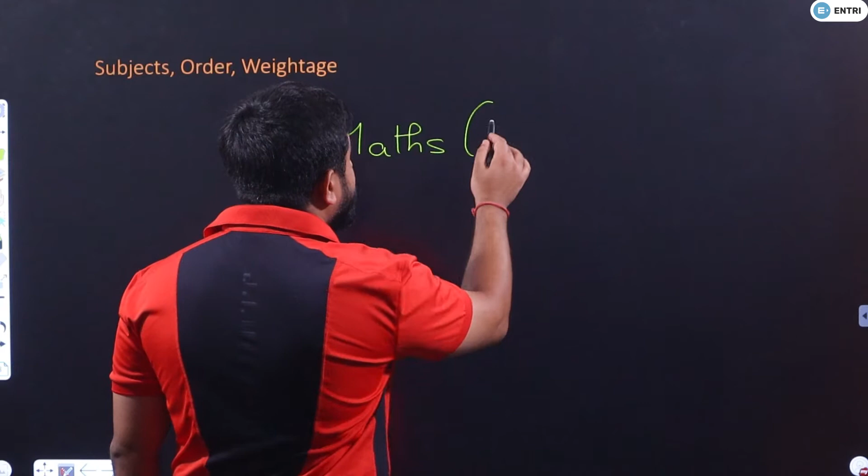Moreover, out of 100 marks of GATE exam, maths is going to give you around 15 marks, 13 to 15 marks.

If you know maths, the basics are going to be helpful to you in the derivations of strength of materials, theory of machines especially the vibration chapter, and fluid mechanics, because fluid mechanics is maths only.

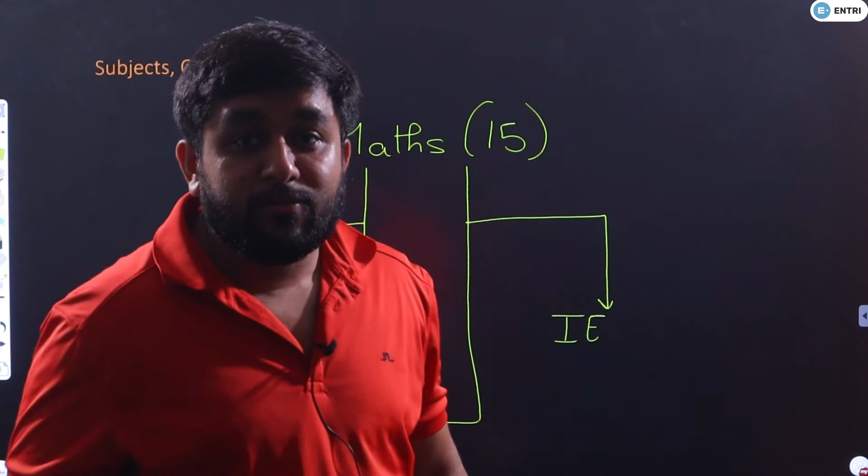It is like maths only, and the same maths will help you in derivation of heat transfer also. Moreover, maths helps you a lot in industrial engineering. For all these subjects, if you are good in maths, especially differential equations, calculus, maxima, minima, graphs, and solving differential equations, those two chapters are required.

But for industrial engineering, you need probability and statistics also. So if you know maths now, not only will you get these 15 marks, but you will get these remaining marks also. That is why maths is very important.

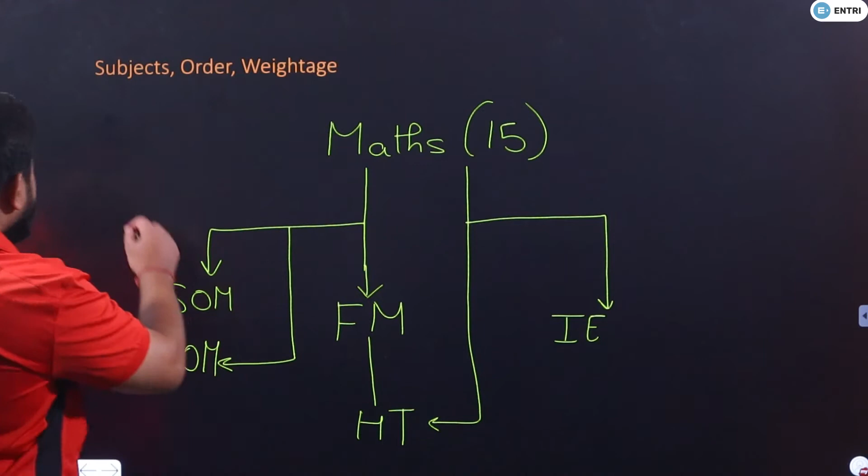Now there is the subject of engineering mechanics also. Engineering mechanics simply means how things move, when you apply force, how things move. So concepts of engineering mechanics are important for strength of material, theory of machines, and fluid mechanics also. Engineering mechanics is the prerequisite for these three subjects.

However, the weightage of engineering mechanics is less. On an average, if you take the last 20-25 years, it is only 4 marks. But it is a very important prerequisite because it will make your life easy in these three subjects, that is why it's important. Even though its weightage is less, I would always suggest before doing these subjects you must go for engineering mechanics.

Now there is one particular subject, manufacturing, and for the GATE exam, manufacturing does not have too much maths or too much concept of mechanics. In actual, manufacturing does require maths, thermodynamics, a little bit of fluid mechanics and heat transfer, a little bit of engineering mechanics, in fact a lot of engineering mechanics and SOM also. But our syllabus of manufacturing now is not much based on these subjects.

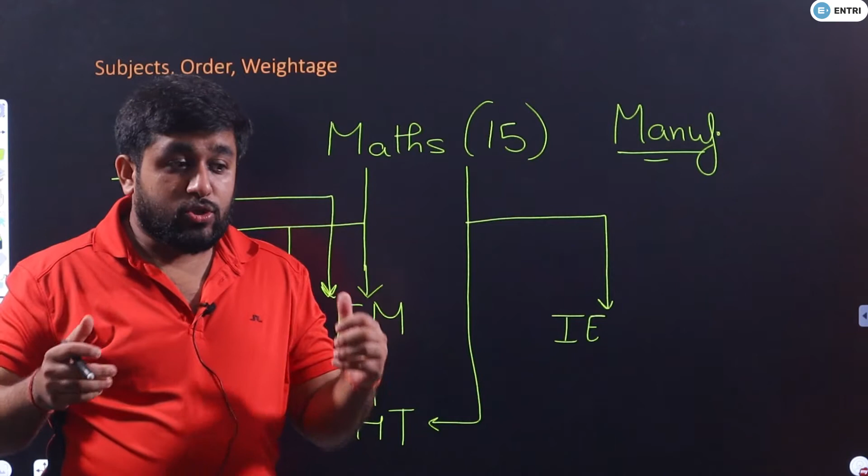So you can study it just after maths also. And why can you do that? Because manufacturing is a big subject with a lot of knowledge-based points in it, not concepts, knowledge-based points - what is the temperature of this, what is this material, like this. So such kind of subjects you have to revise again and again, then only your memory of this subject will be sharp.

If you do the subject before the other subjects, you will have a lot of time to revise it. You can revise it again and again, and you will definitely become very strong in the subject. And why is it important to be very strong in this subject? Because it holds a weightage of 17 marks, that is why it is very important.

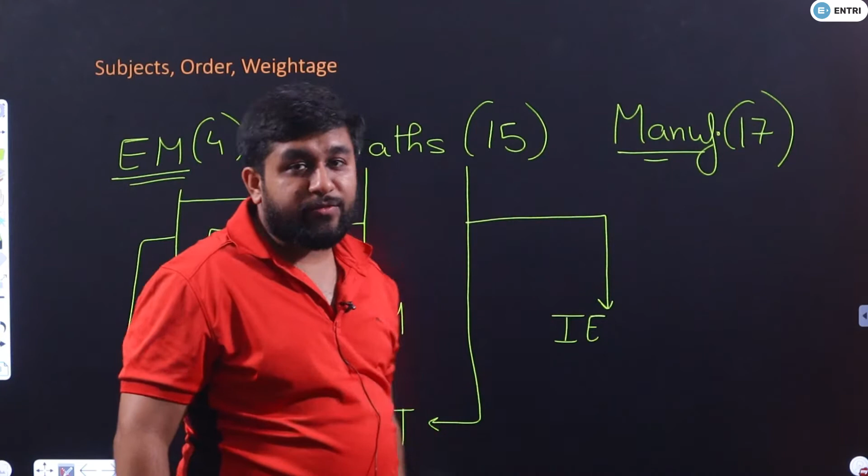So you can do one thing: prepare maths first, then start preparing manufacturing. After your maths and manufacturing are over, then you can look for the remaining subjects. Sir, is there any subject pending? Yes, a very big subject is pending, thermodynamics, and thermodynamics will hold a weightage of 9 to 11 marks, most probably 10 marks.

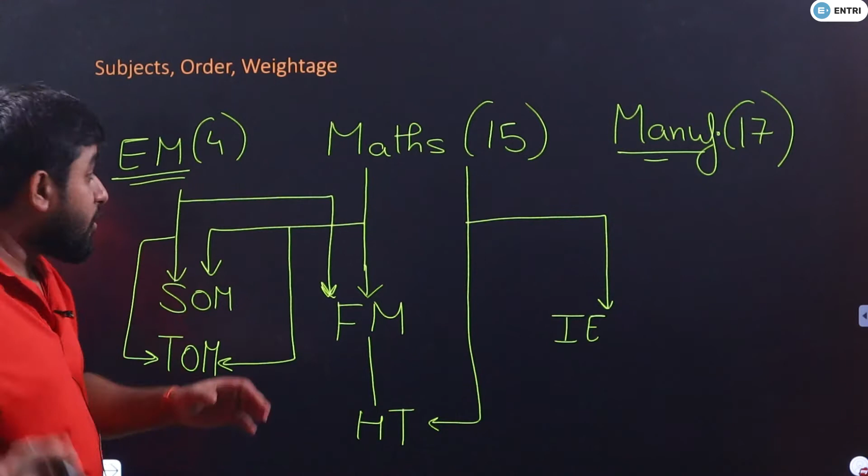So it is a big subject without any prerequisites. Whenever you are starting preparation for the GATE exam, it is always important to cover these subjects first, because these three subjects do not have prerequisites. In fact, they are the prerequisites of other subjects, and manufacturing has a lot of weightage. So it is always suggested to go for these subjects first.

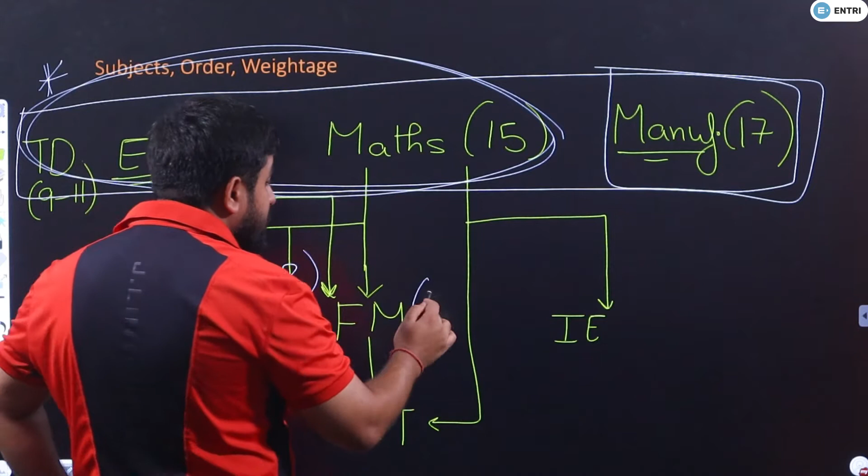Then what about SOM, sir? How much weightage? 6 to 8 marks. Sir, how much weightage ToM? 7 to 9 marks. Sir, how much weightage FM? 7 to 9 marks. How much weightage heat transfer? 4 to 5 marks. And how much weightage industrial engineering? 4 to 5 marks. And yes, there is general aptitude also, right?

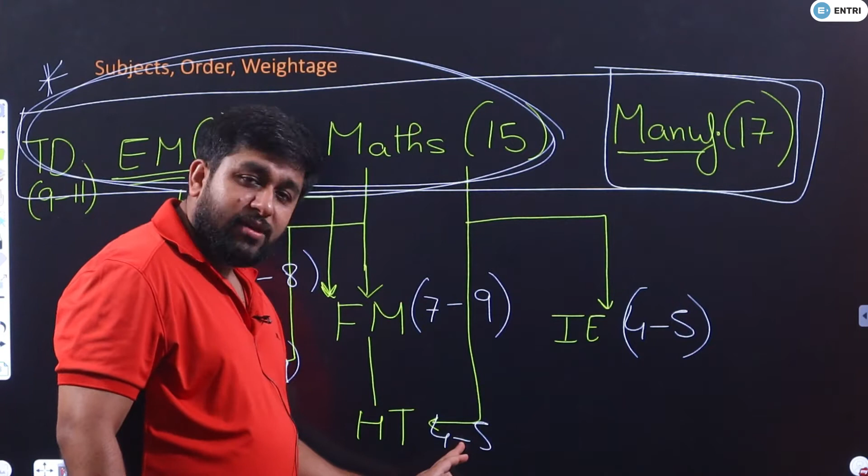General aptitude itself is 15 marks. I think if you take the sum, it will be somewhere around 85 now. So 10 plus 4 is 14, 14 plus 15 is 29, 29 plus 17 is 46, 46 plus 7 is 53, 53 plus 8 is 61, 61 plus 8 is 69, 69 plus 4 is 73, and this contributes to 80. So basically 1 mark here and there - actually the weightage of a subject is not fixed, it can go up and down. So near about they are going to give you 85 marks, with 15 marks for aptitude.

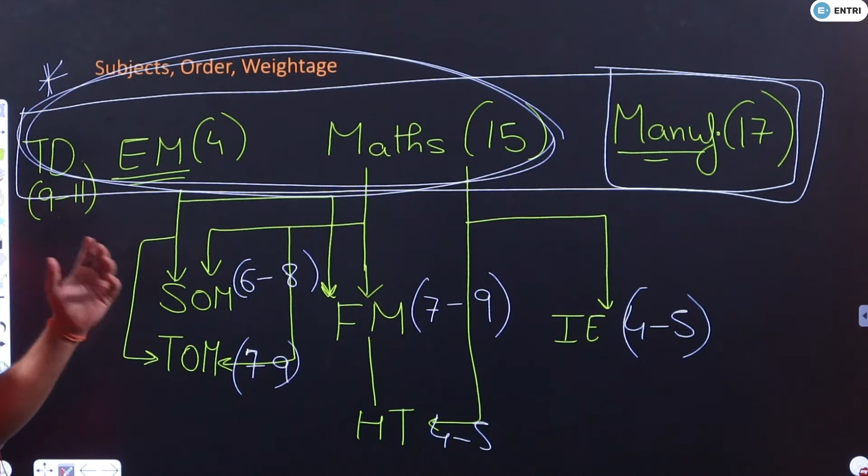Now let us discuss the syllabus one by one. What is the syllabus of thermodynamics, fluid mechanics, heat transfer, maths, and then engineering mechanics, strength of materials, theory of machines, machine design, etc.

You might say, sir, why have you not written the topics of the first 4 subjects? Bhaiya, I am the best expert of these subjects, so I don't need to write the topics of these subjects. I can tell you directly, that's why.

So guys, thermodynamics - this subject is thermo plus dynamics. Thermo means heat and dynamics means the effect of heat. Dynamics means effect, change, variation. So variation due to heat.

Actually, a little bit of talking about thermodynamics was going on from 2000 years ago, but the subject came into picture when the steam engine came into picture, when we realized that yes, heat can be converted into work. That is when the subject started.

Initially the aim was to understand how we can convert heat into work and what are the effects of that work. But later, when we started designing the steam engine, we started developing the concepts of thermodynamics. That is when we realized the concepts applicable over here are actually applicable throughout the universe for any kind of phenomena.

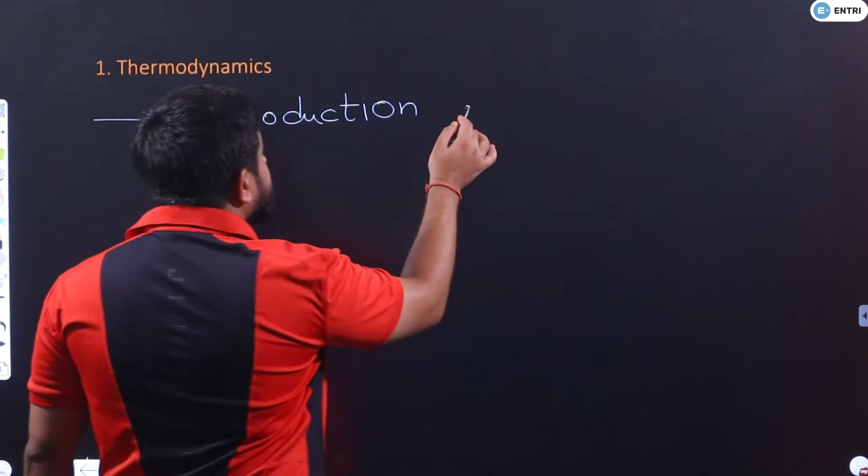So these things you will talk about. And in the introduction and temperature chapter, you will also write down the zeroth law. Now some teachers teach introduction and temperature separately - I generally teach it in a combined way, but it depends from whom you are learning the subject.

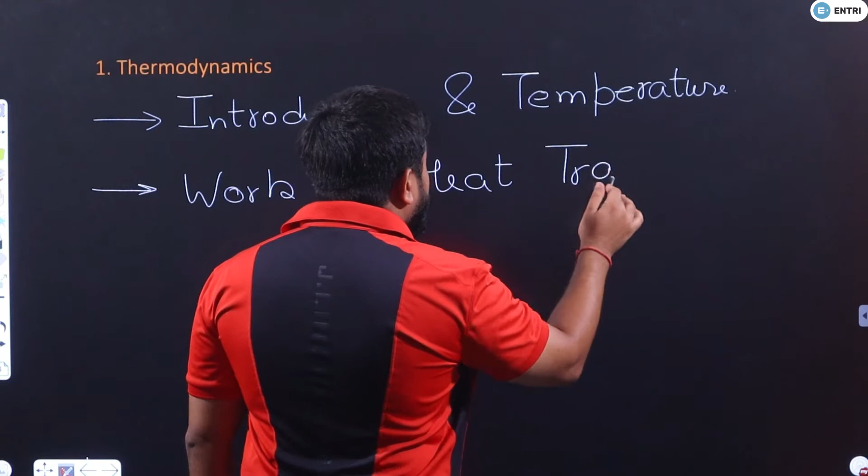Then after learning the basic terms, what will you do? You will talk about work and heat transfer. You will try to analyze if a system is losing or gaining energy in form of heat and work, then how the properties of the system - pressure, temperature and volume - are going to change. So we will learn different heat and work transfer processes.

Some processes you will call isobaric, some you will call isothermal, some you will call adiabatic. So let us suppose we are heating a gas but maintaining the pressure as constant - this will become an isobaric process. Iso means constant, bar means pressure, so constant pressure process.

So you will learn that when we are heating the gas, how the graph will look like - something like this you will try to learn over here. And once you are aware of this work transfer and heat transfer, then you will learn the first law of thermodynamics.

First law of thermodynamics simply says energy can neither be created nor destroyed, it can only be converted from kinetic energy to potential energy, or it can be given from one body to another, like sun to earth. However, it can neither be created nor destroyed.

So you will learn how to apply thermodynamics to various phenomena going on around us. Maybe combustion is going on in the engine - so how to apply this law over there?

So the first law of thermodynamics will be applied for two types of systems - one is closed system and the other is open system. So don't worry, you will learn what is a closed system and what is an open system over there. So don't worry at all.

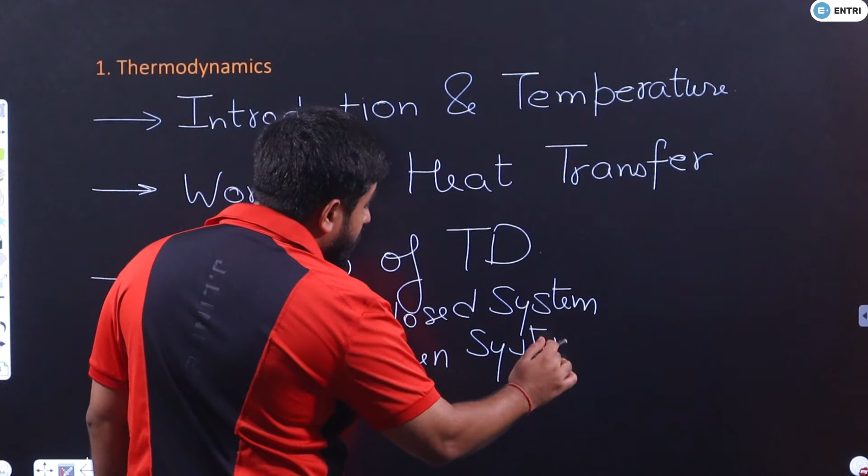Now, the first law of thermodynamics says that when a process happens, the energy is conserved. Someone may lose energy, but someone else will gain that energy.

So thermodynamics tells you energy conservation. Now suppose there is a rod, one side hot, other side cold. The hotter side will lose energy and the cold side will gain that energy, and ultimately the temperature of the rod will become uniform. Energy conservation only says one side is losing heat and the other is gaining heat, but no energy is destroyed or created.

Now suppose there is a rod, initially at uniform temperature. What if one part starts rising in temperature and the other part starts going down by itself? Can it happen by itself? No. If one side is hot and other side is cold, they will exchange heat and the temperature will become the same. But is it possible that initially the temperature is the same, and by itself one side starts going down and the other side goes up?

The first law of thermodynamics says if one side is losing heat, temperature going down, the other side will gain that heat and temperature will go up. First law only says this, but it does not say that the reverse is not possible. It cannot happen that the temperature of this rod, initially same everywhere, starts rising on one side by itself and falling on the other by itself.

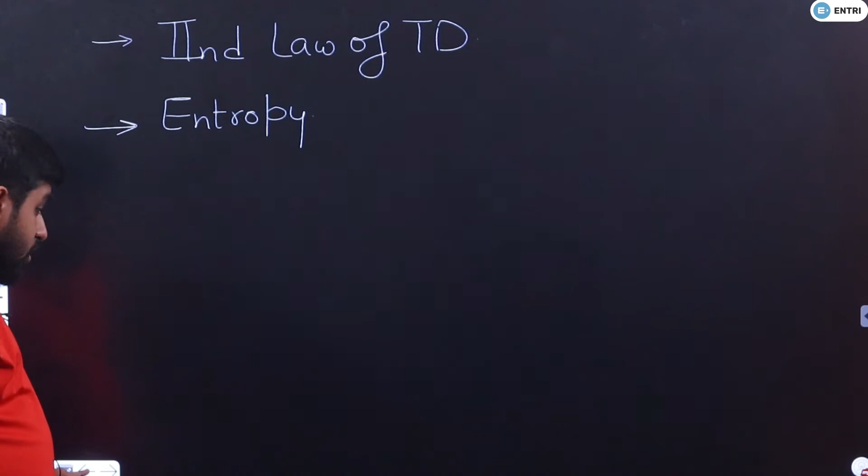Actually, when you apply the first law for a closed system, and then apply the first law for an open system, similarly you will apply the first law for a process and for a cycle also. Similarly, the second law applied for a process and the second law applied for a cycle. So when the second law is applied for a process, this property comes into picture, that the substance has an additional property called entropy.

Every substance has a property called entropy, and during any process, when the bulb is giving me light, when I am speaking to you, when you are watching the lecture, the entropy of the universe is increasing. So we will talk about the entropy principle and see how it is applicable to devices like power plants, IC engines, refrigerators, etc.

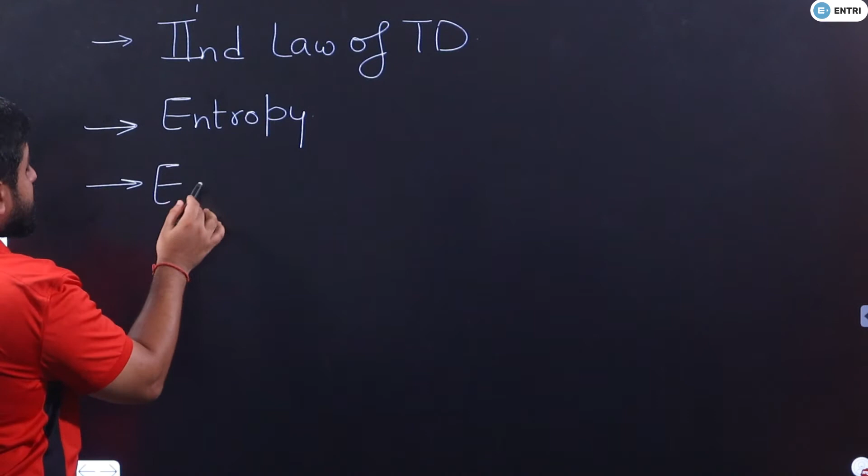After this we will also talk about the concept of exergy, that is, how much out of the available energy can be converted into useful form. Then the topic of some thermodynamic relations will come into picture, like Maxwell's equations, Joule-Thomson effect, thermodynamic relations.

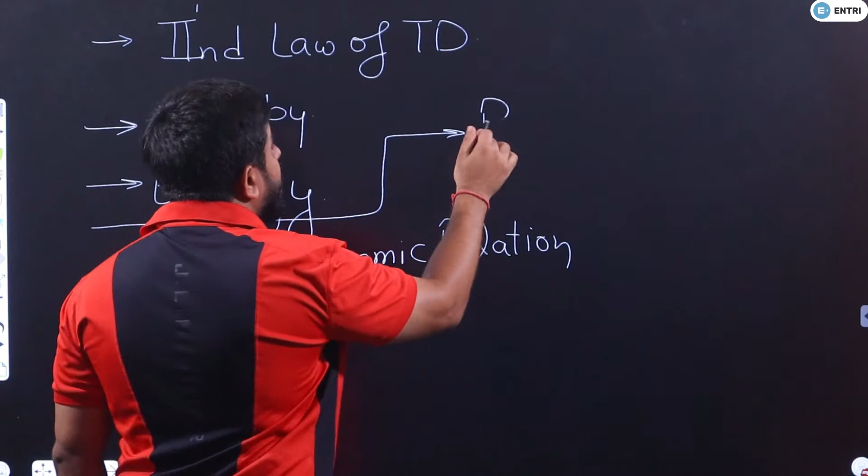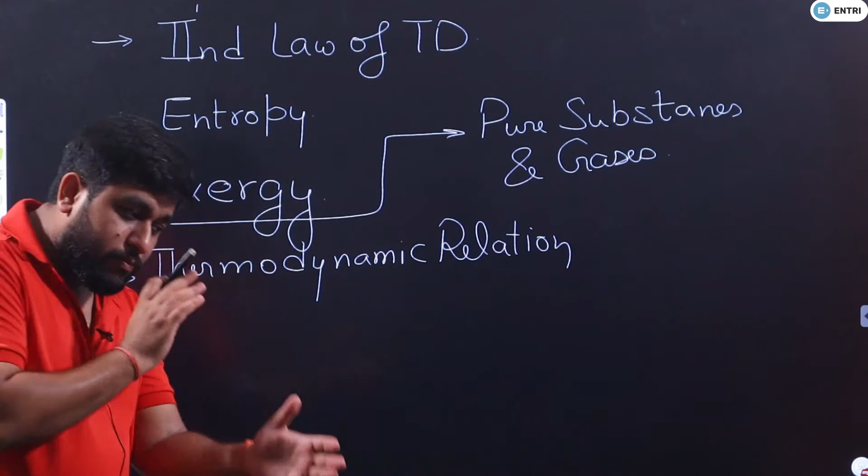We will also talk about pure substances, and draw different charts for pure substances and gases. If you are heating them, what will be the pressure-temperature chart, the pressure-volume chart, enthalpy-entropy chart, enthalpy-temperature chart, pressure-enthalpy chart. So such kinds of graphs we are going to discuss.

Now, once this is over, in thermodynamics you have to do some additional chapters. This is actually called basic thermodynamics. So what you have to do is apply these concepts to power plants. That chapter will become the Rankine cycle, which is the thermodynamic cycle on which a steam power plant is based.

In the Rankine cycle, you will have some modifications also, like regeneration and intercooling. So we are going to see the thermodynamic cycle of a power plant, like what must be the boiling temperature in a boiler, what must be the condensation temperature in a condenser, how much power the turbine will produce, and how much power will be required by the pump.

So, what is the efficiency of a steam power plant, what will happen if we do regeneration in the cycle, what will happen if we do intercooling in the cycle. So, that you are going to talk about.

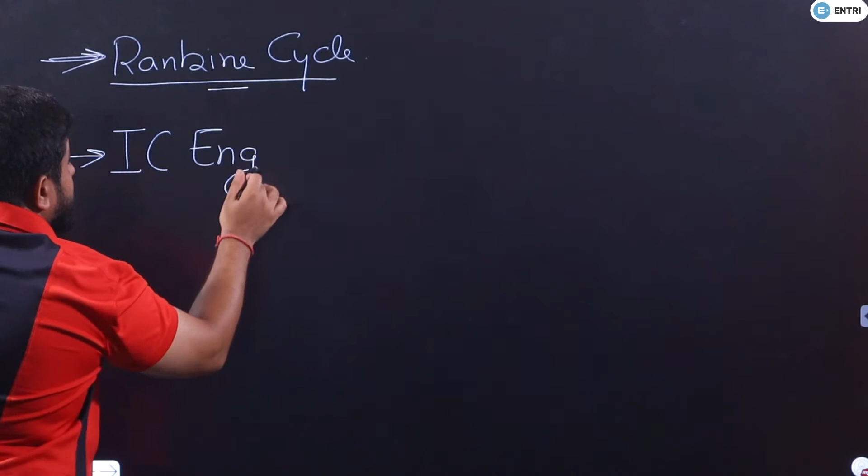Now, similarly, like you have talked about steam power plant, we will also talk about IC engine cycles. Basically, during the combustion process, how the pressure and temperature varies in the combustion chamber. So, IC engine cycles - there will be an Otto cycle related to petrol engines, diesel cycle related to diesel engines, similarly Brayton cycle related to gas turbines. A lot of cycles will be there. Actually, instead of writing here IC engine cycles, better we write down air standard cycles.

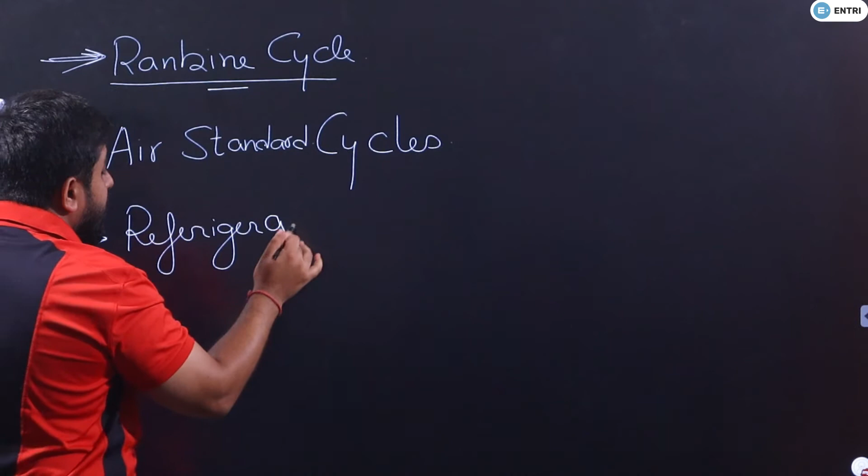Air standard cycles. And the last chapter will be related to refrigeration and air conditioning. So, this is your subject of thermodynamics, and these are the important chapters that you have to do.

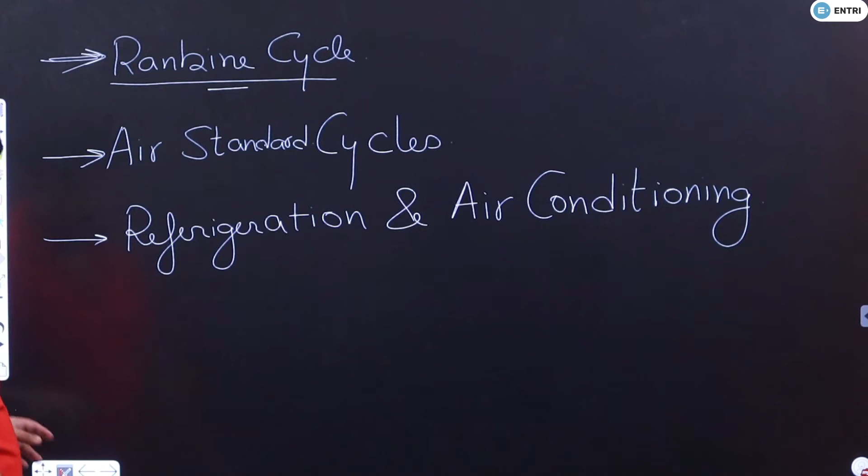Now, you will ask me, sir, what are the important chapters? Frankly speaking, every chapter is important. If you really want to become an engineer, then all these chapters are important. But still, from exam point of view, if you are asking, then definitely air standard cycles, Rankine cycles, refrigeration, air conditioning, then you have entropy, properties of pure substances - these are the most important chapters.

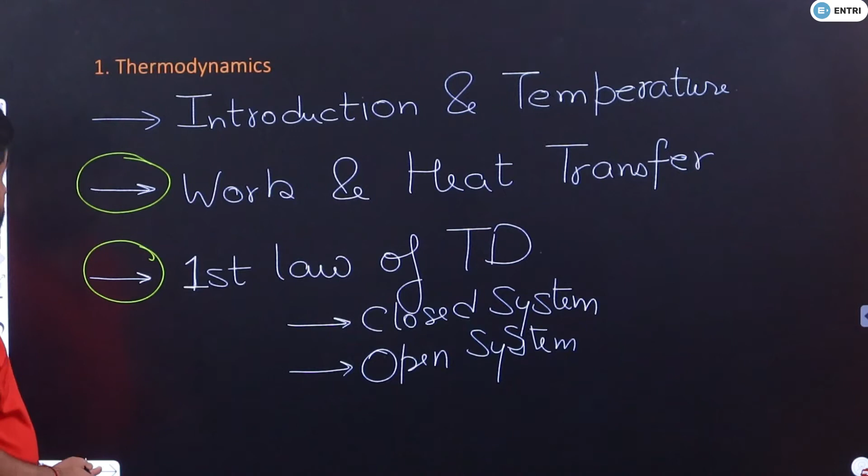Then sometimes from second law of thermodynamics, first law of thermodynamics, work and heat transfer also questions come. But yes, these star mark chapters are the most commonly asked questions in the exam. In fact, from refrigeration and air conditioning, every time 2 to 3 marks question might be there. Every time a 2 marks question from air standard cycle, and almost every time 2 or 3 marks from pure substances. So, these chapters are the most important.

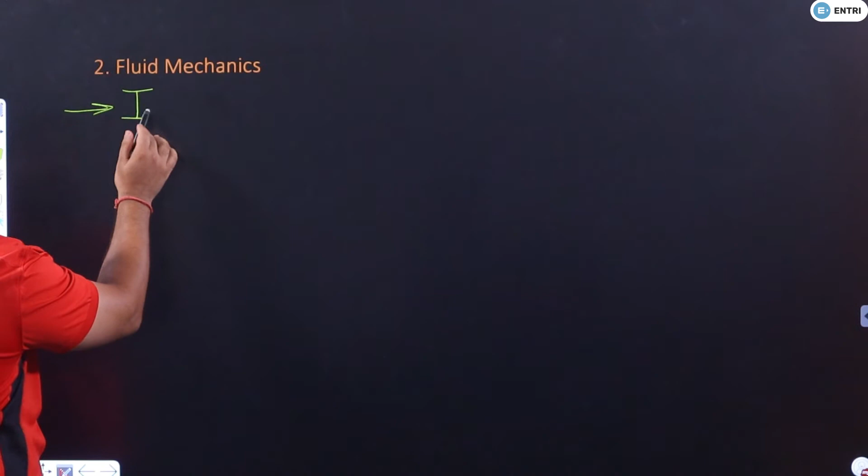Now, let us move ahead. I am not going very deep, I am just giving you a hint of the chapters. Now, when we are talking of fluid mechanics, first of all, definitely there will be the introduction of the subject - what the subject is all about.

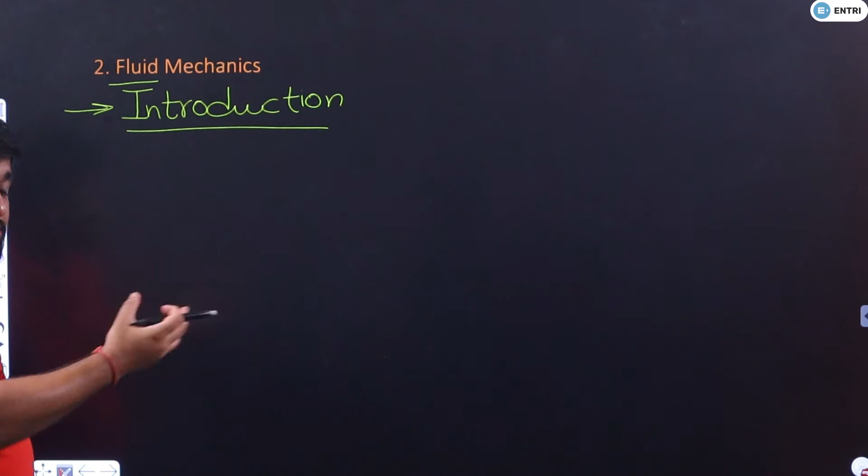Fluid mechanics - mechanics means understanding the motion and deformation of a substance. When you apply force, how the substance is going to move, how the substance is going to deform. So, if the substance is fluid, then fluid mechanics. So, first of all, you introduce yourselves: what is the objective of the subject, what are the applications of the subject.

And you talk about properties, some important properties which will be helpful in understanding the motion and deformation of the fluid. What are those properties? Density, bulk modulus, then viscosity, a very important property. When you are learning viscosity, there is an effect of viscosity called boundary layer.

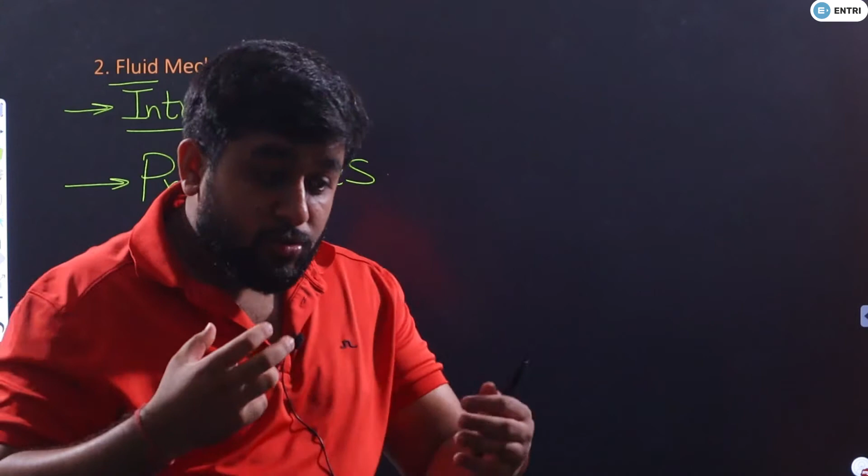Other important property from exam point of view, that is surface tension and vapor pressure, saturation pressure. Then after properties, you will move on to the first set of problems, that is fluids at rest. So, chapter name will be called fluid statics.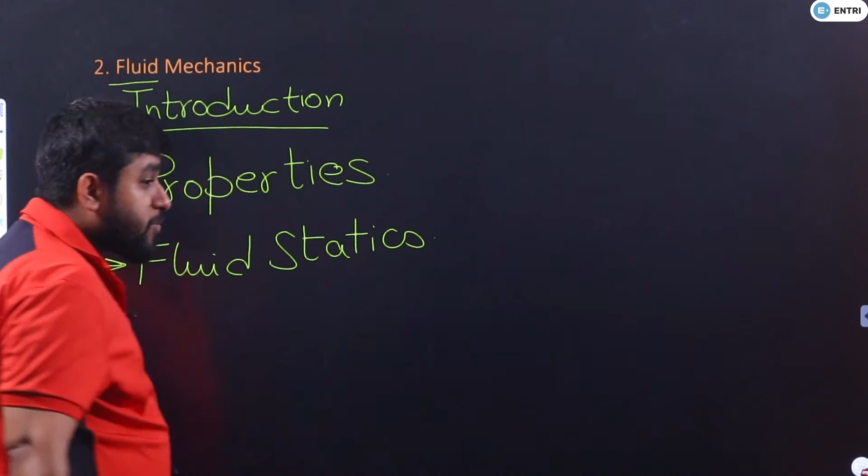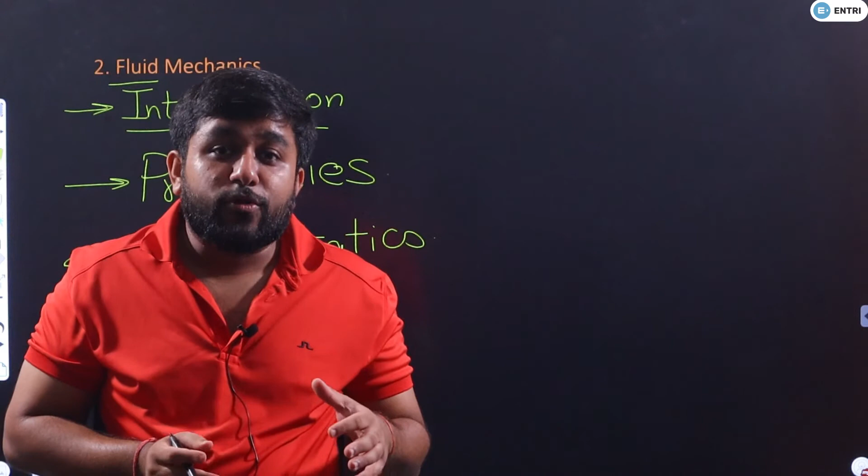So, in fluid statics, you will see what is pressure, what are the units of pressure. Pressure is a scalar term, even though it is a stress. How to find out the pressure at a point, how to measure the pressure at a point, how to find out the pressure at any elevation in the atmosphere, because that will help us understand the lift force on the aeroplane, drag force on the aeroplane, distribution of pollution in atmosphere, filtering of thermal radiation. So, the basic calculation that you do in fluid mechanics has importance in other subjects.

Then after measuring the pressure at any elevation in atmosphere, you will see what is gauge pressure, what is vacuum pressure, why in fluid mechanics we take gauge pressure for all calculations. Then you will see pressure measurement by manometers. So many types of manometers are there, which manometer is good where.

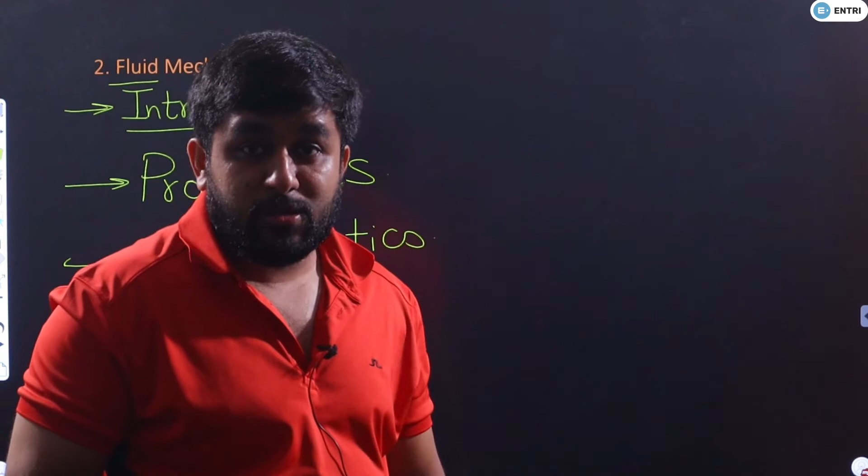Then how to find out the force on the surface of a dam - this will be called hydrostatic force on submerged surface. There is a gate in the dam, the water is trying to open the gate. So, what should be the force in the stopping mechanism? And then we will see how to make the ship float and make it stable. What is the layout of the submarine, why the battery boxes and engine are in the lower compartment.

This will become your fluid statics chapter, very important. Now, in all these examples, the fluid is at rest. So what will we do? We will talk about fluids in motion. We will divide the moving fluids into 3 chapters: first fluid kinematics, then fluid dynamics, and then boundary layer theory.

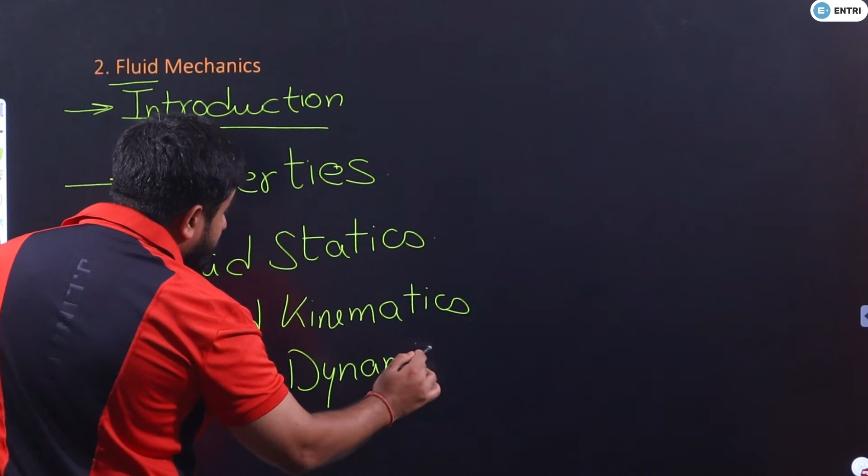Actually, in case of moving fluids, air is moving around the car, air is moving around the fan. So how much force is the air applying on the car? To understand that, you must have the velocity vector, because from the velocity vector you can find out a lot of information.

From velocity of fluid we will find out what is the acceleration in the flow, what is the mass flow rate, what is the mean flow velocity, what type of flow it is - steady, unsteady, uniform, non-uniform, 1D, 2D, 3D. That chapter will become kinematics, and from velocity we will find out pressure, that will become dynamics.

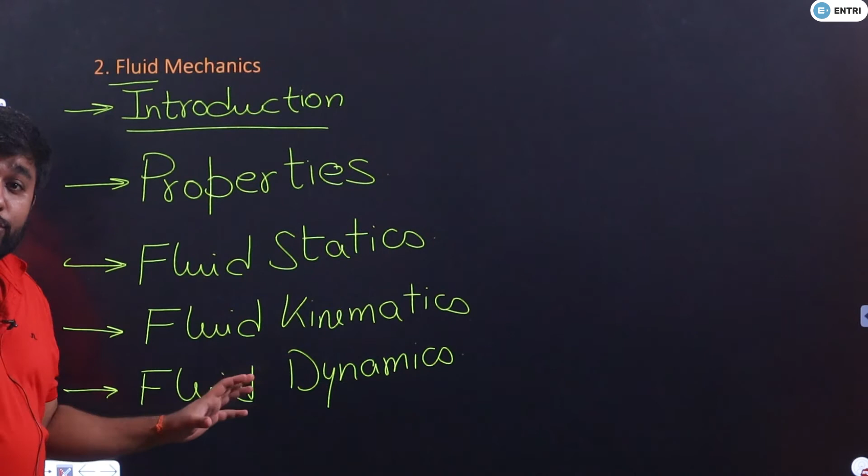Now, from velocity we can find out friction also, but in this chapter we will consider the fluid to be ideal, frictionless. So friction we will talk about in the next chapter, that is boundary layer. There you can find out the friction also because of moving fluids.

Now, once you understand how to calculate pressure and friction in moving fluid, you will do the application of the subject, the application of these 3 chapters, that is flow through pipes.

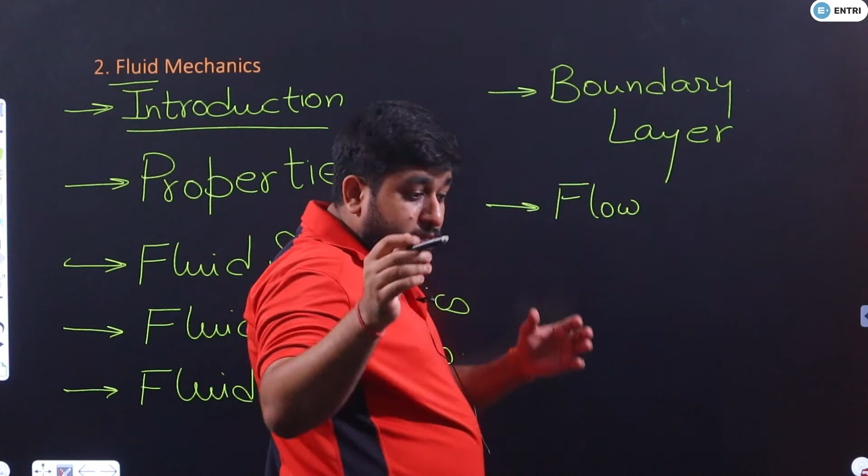In your bathroom, kitchen, building, AC, refrigerator, cars, and even in your human body, there is a network of pipes. So how much pressure must the heart develop so that blood circulates easily throughout the body and distributes the oxygen? That kind of calculation comes from this chapter, flow through pipes.

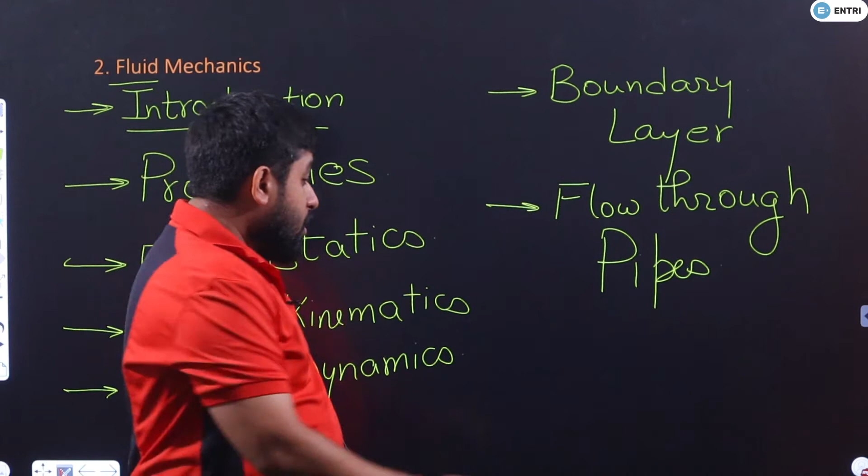Now there are so many important fluid machines around us, like turbines which give us electricity, like pumps which raise water to the top of a building. So we will also see hydraulic machines, and yes, there is one more chapter, that is dimensional analysis.

You will learn the beauty of this chapter in your subject, dimensional analysis. It is an extremely beautiful and extremely important chapter. I will tell you about this there only.

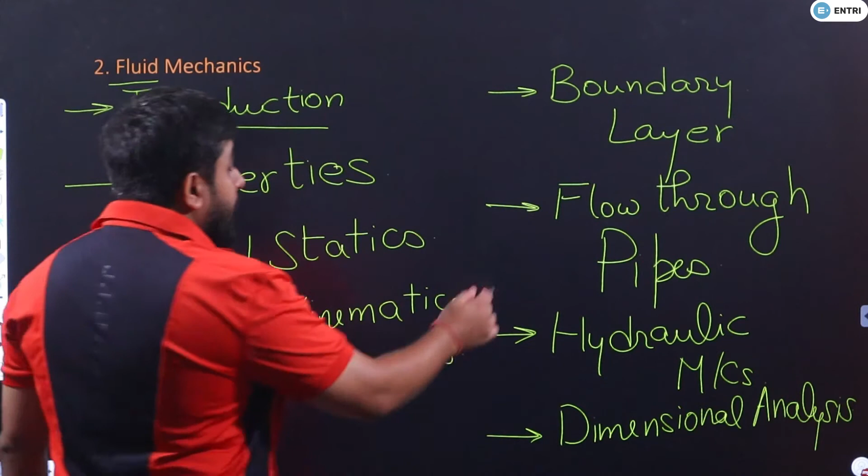Sir, what are the most important chapters from exam point of view? Definitely dynamics and kinematics are very, very important, because every year questions come from them. And yes, flow through pipes is also important. Hydraulic machines, frankly speaking, questions come, but not such heavy questions - simple questions only come from hydraulic machines. And yes, statics and dimensional analysis are also important.

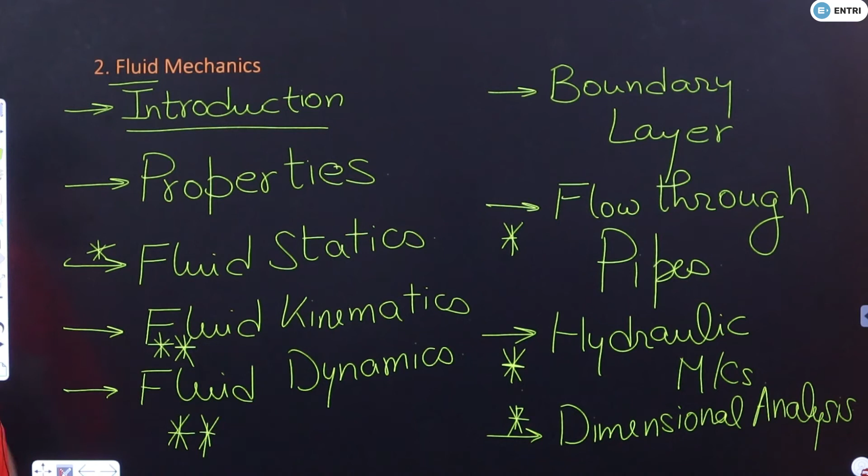So hydraulic machines and boundary layer, you can consider them at the same level. Actually, from hydraulic machines, not very heavy questions come - questions come, but simple ones. You can imagine in the last 35, 36 years, more than that, only 45 questions have come. So just imagine yourself, what is the importance of this chapter in GATE. Though the chapter is extremely important in real life, in GATE its weightage is a little less.

Anyway, heat transfer, next subject. In heat transfer there will be 5 chapters. First one is the introduction - what is heat? What is heat? What is the objective of the subject? What are the various mechanisms through which heat transfer happens?

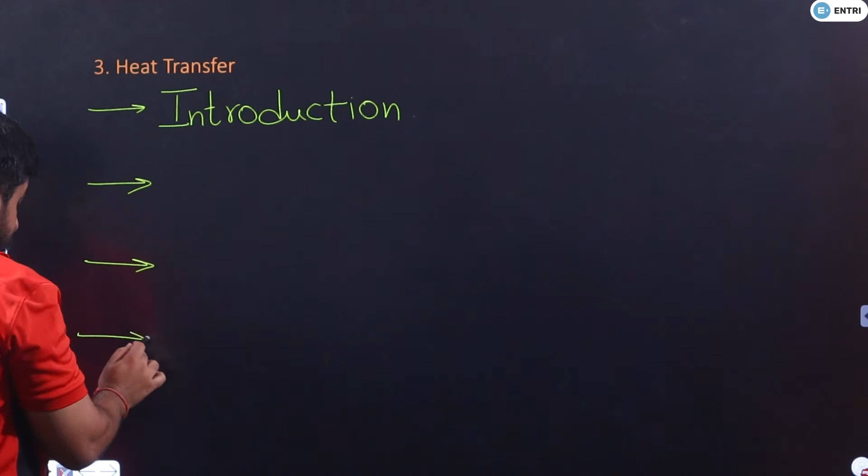So you will say, when we are talking of the sun, a lot of heat is produced in the core of the sun, but that heat reaches the surface of the sun by convection. So there will be a chapter of convection, mode of heat transfer is convection. Once the heat reaches the surface of the sun, it is received at earth by thermal radiation.

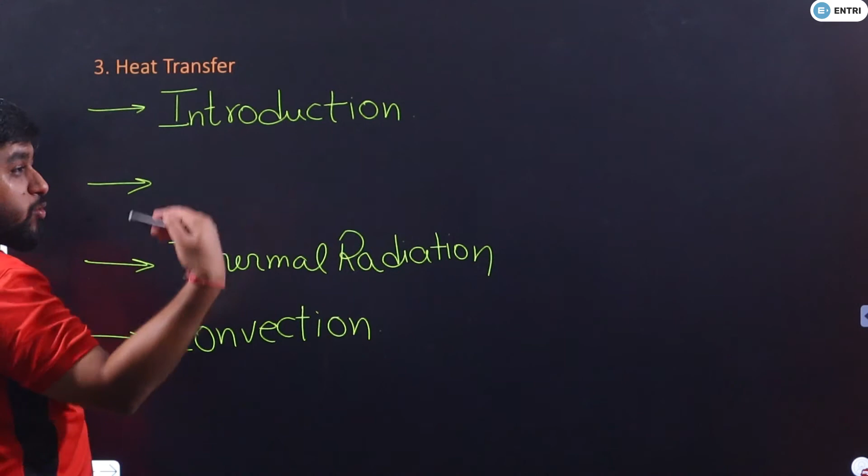And once that heat reaches the outer surface of the wall, how does that heat come inside? By conduction. So we will have dedicated chapters to each mode of heat transfer, and the last chapter will be an application called heat exchanger. So these are the 5 chapters.

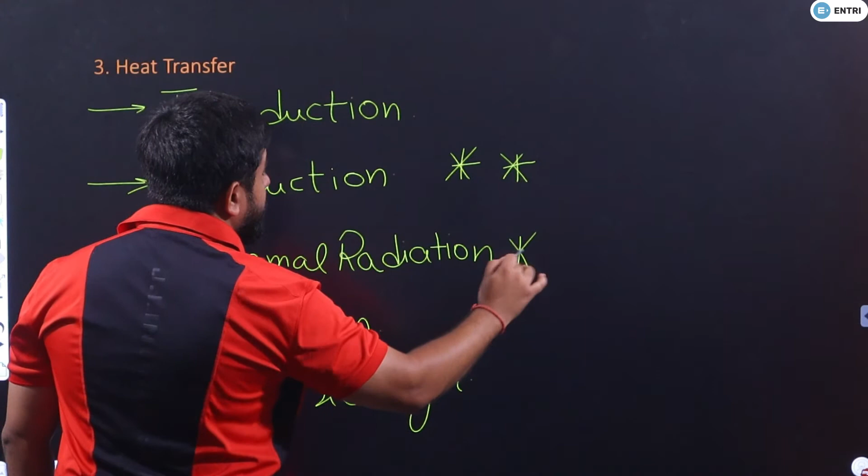Now, in conduction, you will learn what is conduction, what is the equation used to solve conduction, what is the property associated with conduction, which you call thermal diffusivity and thermal conductivity, and how to solve conduction in various scenarios.

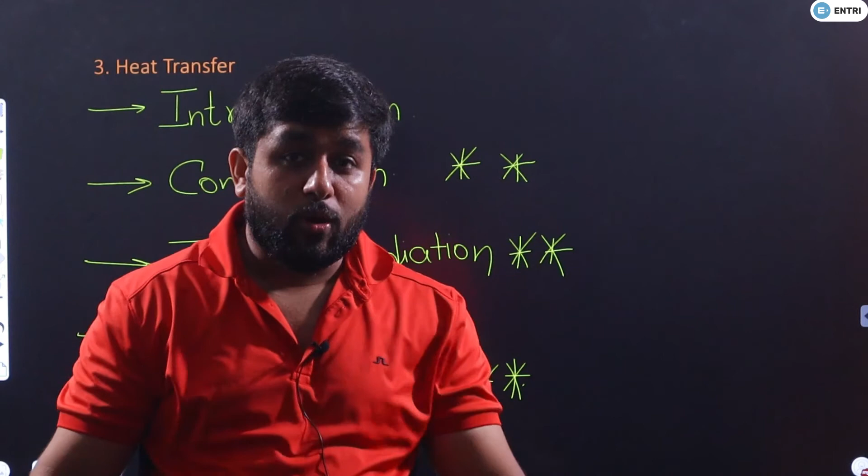Like this wall is a planar body, how heat is going out by conduction through the planar body. The pipe is a cylindrical body, inside I have hot gas, how that hot gas is losing heat through the cylindrical body, okay, like this. The thermocouple junction, that is a spherical bead - so when the hot air passes by, how the temperature of the spherical bead will change by conduction. So those things you are going to learn over here.

Then the energy that I am receiving from the bulb or from the sun - what is the frequency and wavelength of the waves?

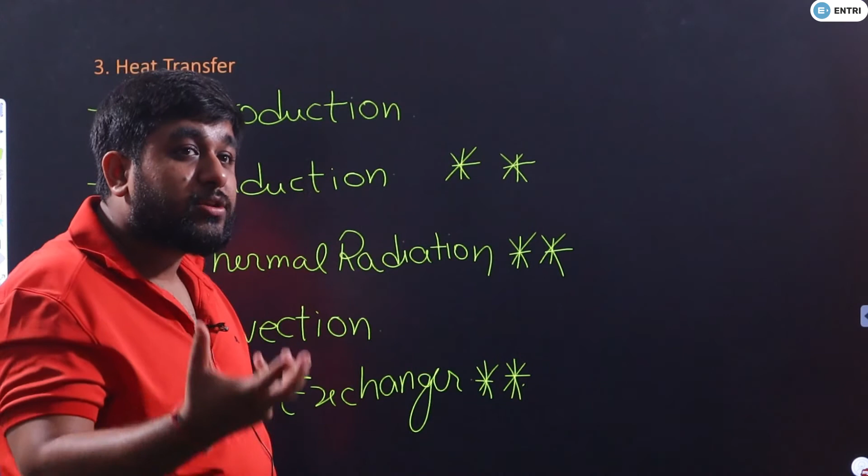Now, what is a black body? How much energy is emitted by the black body? If we say this bulb is a black body, how much energy falling from that black body is on my surface? How much energy are the sun and earth exchanging? Such kind of calculations we will do over here.

And yes, heat convection is extremely complicated. When we are boiling water, water is rising up, how is the heat propagating? That we will learn over here. Convection is so important that the weather at your place is a result of convection. The clothes that you are wearing and the food that you are eating is based on the convection in your region, in your state.

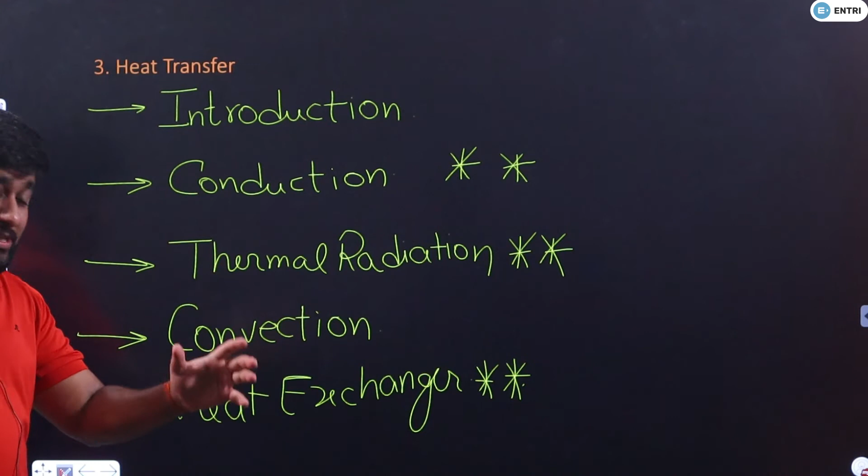Anyway, heat exchangers: your laptop has a heat exchanger, your AC has heat exchangers, refrigerator has heat exchangers, steam power plants have heat exchangers, IC engines have heat exchangers. They are everywhere, so we will talk about them. So, this is your heat transfer.

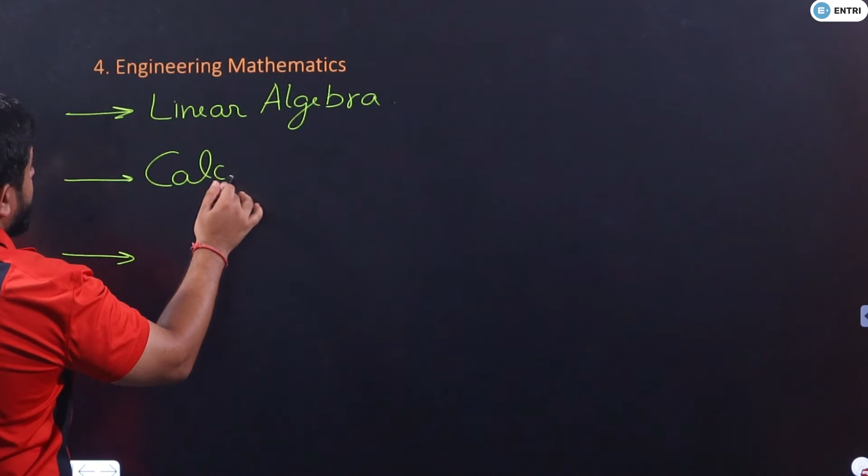Next, mathematics. Frankly speaking, when we are talking of maths, there are two possibilities of starting: either you start with linear algebra or you start with calculus. I always suggest, or you can also do probability and statistics first. You can do calculus, you can also do probability and statistics first, and if you have a little idea of derivatives and integration, you can also start with differential equations.

Just hold on guys, let me write down all the units. So, these are units and these units have internal chapters: linear algebra, calculus, differential equations, then probability and statistics, then complex numbers, and in the last, numerical methods. So, you can say like this: Laplace transforms and numerical methods.

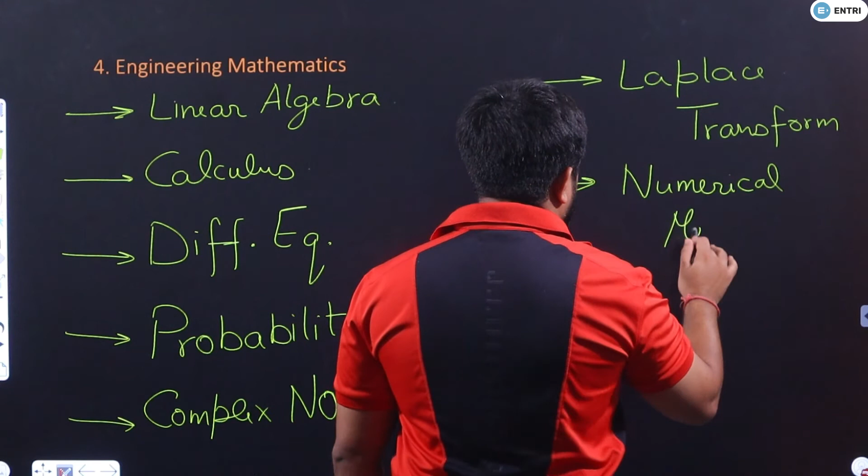On an average, every GATE exam, every GATE paper: 3 marks from here, 3 marks from here, 5 marks from here, 3 marks from here, 3 marks from here — that is like the average, fixed. So a single chapter is definitely giving you 3 marks, it is like this. However, some ups and downs are always there.

So, entire maths is important for you, but yes, suppose if you are late in preparation and do not have much time, then you can ignore these 2 chapters for now, because it might be possible you are getting only 1 mark question from numerical methods, or maybe 1 mark question from Laplace transform, or maybe no question from Laplace transform. This can happen. But these 2 chapters are very small, so even if you are spending 1 day on these 2 chapters, you can do it.

Anyway, so when you are starting maths, either you can start with linear algebra, you can start with calculus also, you can start with probability and statistics also, whatever you like. But I always suggest students to start with linear algebra, maybe because I teach robotics and CAD/CAM, so linear algebra is a part of that. But then I am much more deep into fluid mechanics and heat transfer, which is totally based on calculus and differential equations. So, frankly speaking, I do not know why, but I always suggest students to start with linear algebra. Maybe it is a little bit easy and looks more like maths, maybe that is why.

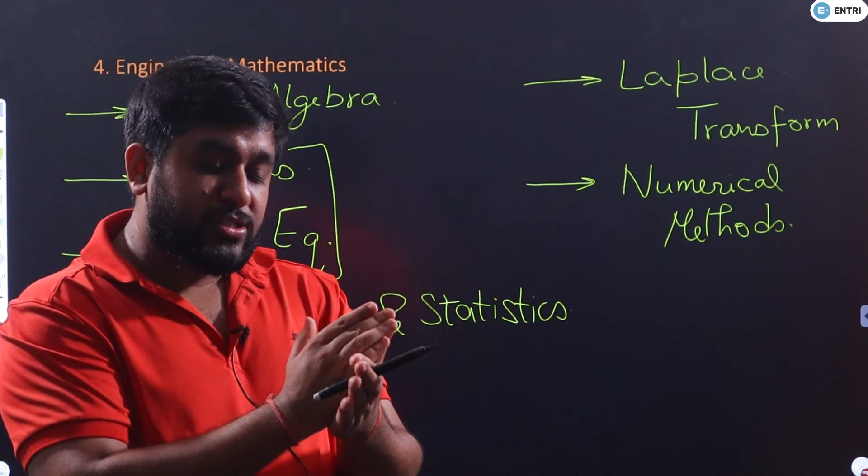So, when you are talking of linear algebra: what is a matrix? What are the different types of matrices? How to write a matrix? How to write the definition of a matrix in form of a formula? So, while solving them, adding them, subtracting them, multiplying them, you can write short equations. Yes, we are going to add matrices, subtract matrices, and multiply matrices. Once you understand what a matrix is, you are going to use matrices to solve linear equations, and for that there are various methods like Gauss elimination method. You will also talk about vector spaces, linear transformations, and vector calculus also.

In this chapter, the most important topic is the eigenvalue and eigenvector problem, because if there are 10 sets of matrices, you will find the eigenvalue problem in 9 sets. So that is the most important topic of this chapter, linear algebra. Calculus, differential equations — everyone knows calculus means limits. Y is a function of x. So, if the value of x is approaching 0, then the numerical value of y will approach what?

So that is limits. What is a derivative? What is an integral? What is maxima minima of a function? How to find out the area of a surface? How to find out the volume of a body? So those things you are going to learn over here.

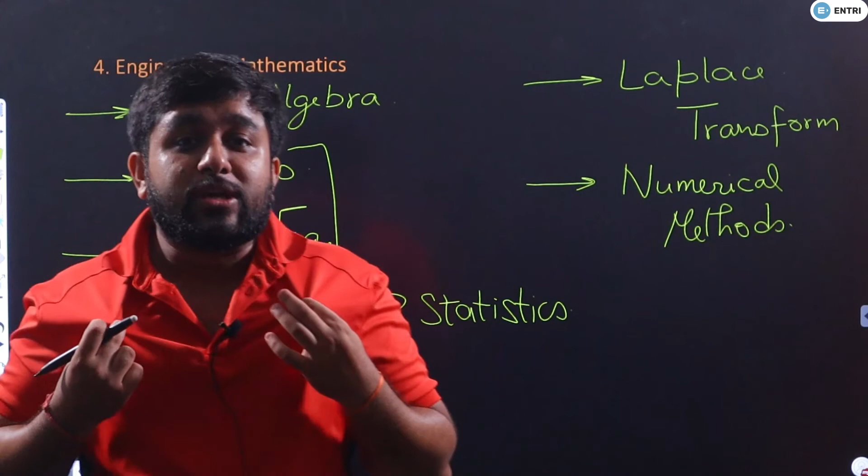So basically you will learn the meaning of derivatives and integration, and then we will apply this understanding to solve differential equations. Right now my body is losing heat by convection, that is explained by a differential equation. If there is a spring mass system, the spring is moving up and down, the floating ship in water is moving up and down because of waves, that is explained by a differential equation. What will be the pressure in air at this particular point, that is explained by differential equation.

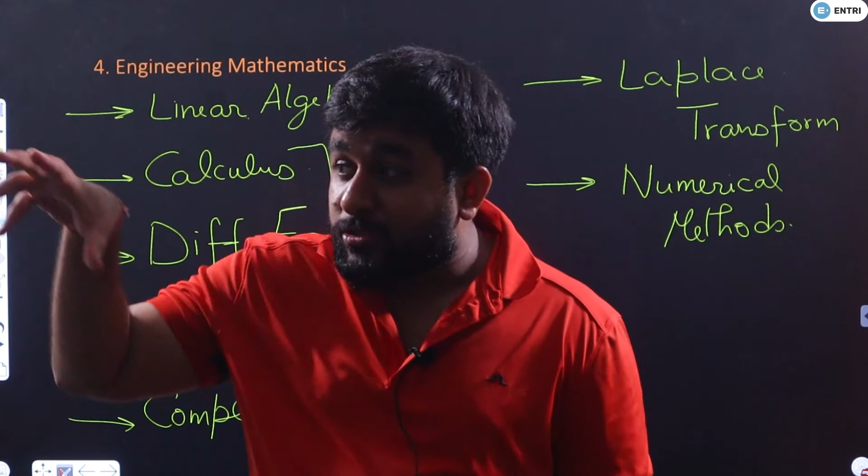So what are the various types of differential equations, how to solve those differential equations, that you will learn over here. This time, who will win the World Cup? Probability. And analyzing a lot of previous data to predict the future, that is probability and statistics. The world runs on probability and statistics, right?

Very, very important topic. Yes, complex numbers will come, Laplace transform will be there, how to solve complicated differential equations by converting them into simple equations, and numerical methods, again an alternative to solve differential equations, and root kind of problems, finding root kind of problems.

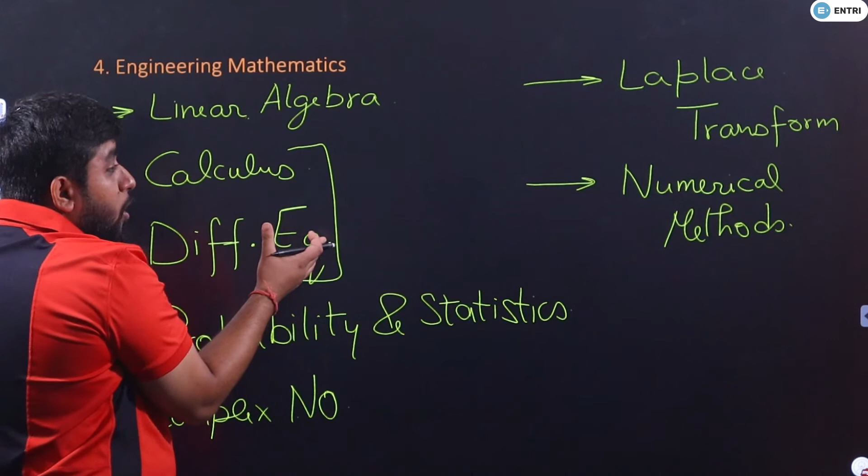So your softwares, which give you simulations like Abaqus, ANSYS, etc. What do they do? They use numerical methods to solve complicated differential equations. So you will learn about numerical methods also.

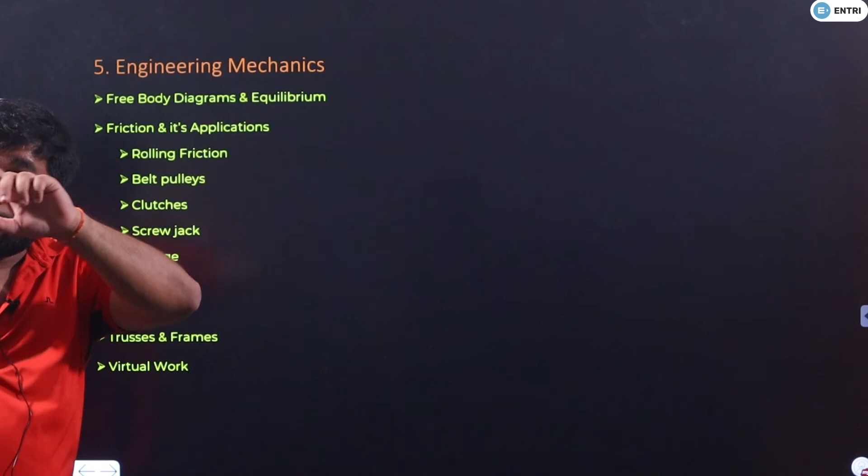Then you learn this - I am inside a structure, this building is a structure. So how to find out the forces on various members of the structure. I am sitting on a steel chair, so there are so many rods on the chair, how to find out the force on every rod of the chair, right? So that you learn over here.

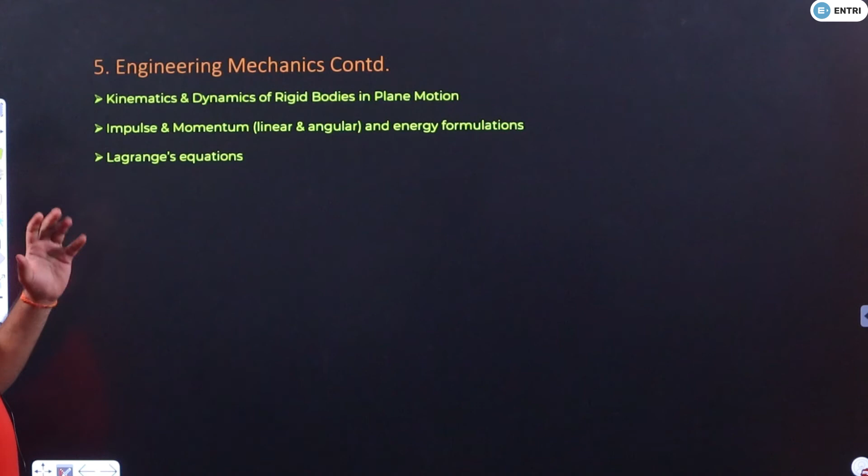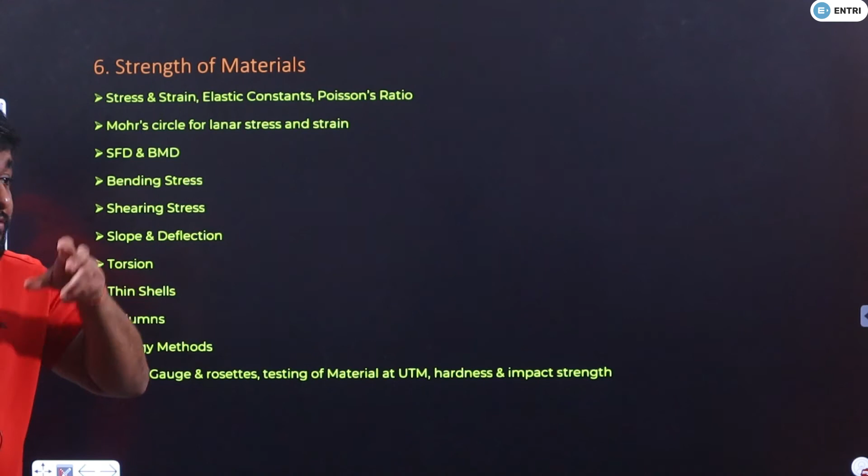There are some other topics also which will be helpful in your remaining subjects. Then strength of materials. In the very first chapter you will learn that when we apply force on an object, the object will deform, and when the object deforms, there will be an internal stress in the body. So what is stress? How to write deformation in terms of strain? What are different types of stresses? What are different types of strains? What are the different properties which relate stress and strain? That is what you learn in the first chapter.

Then in the second chapter you learn that if on one plane in the body this is the stress, on the vertical plane of the body this is the stress, then what is the stress on the inclined plane? That you learn in the second chapter, the Mohr's circle part.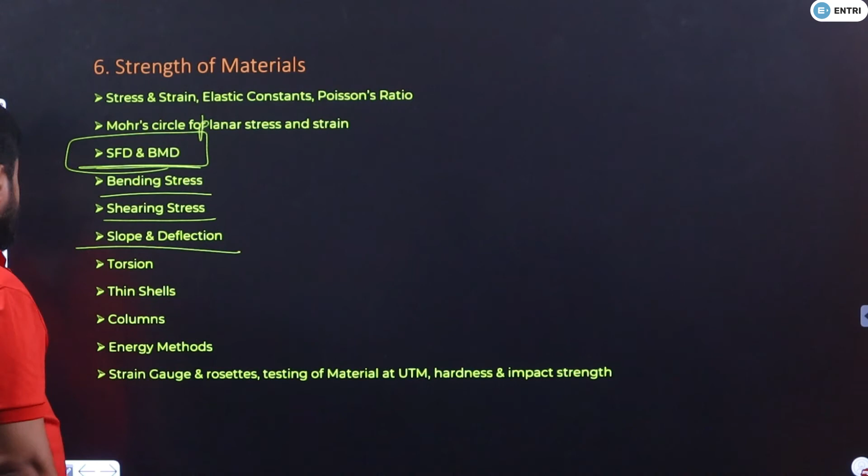Then what do you do? You take a beam, on the beam there is so much load, so what will be the shear force and bending moment diagram of the beam? What will be the bending stress in the beam? What will be the shearing stress in the beam? And what will be the deflection in the beam? Very, very, very important topic of strength of materials, because you can definitely expect questions from these.

Then there is a shaft, we are rotating the shaft and transmitting torque. So how much is the twist in the shaft? How much is the stress in the shaft? There is a container for storing gas at very high pressure. How much is the stress and strain in that container? Deformation in that container. There is a column of the building. How much deformation is there in the column?

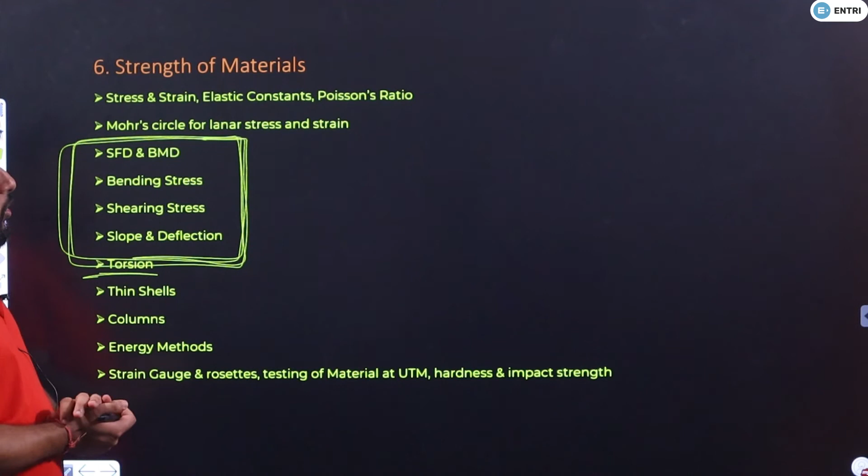And then last, energy methods for solving these problems. So when you are talking of this subject, actually thin shells, columns, this and this, these are the most important topics, and you will definitely expect questions from at least SFD BMD, slope and deflection. You can definitely expect questions from these.

And this box now, if you know calculus, if you know how to make graphs, then this box will become very easy for you. SFD BMD, slope and deflection will become very easy for you.

So your calculus must be strong if you want to be very fast in these chapters. Okay, then one of the favorite subjects of everyone.

Like you have gears in your watch or in a toy car, I hope you understand what gears are. Through that combination of gears, which we call gear trains, they could predict the position of every planet and star in the sky. The calculations that we do by computers, which take a lot of days to give that calculation, they were doing with help of gear trains.

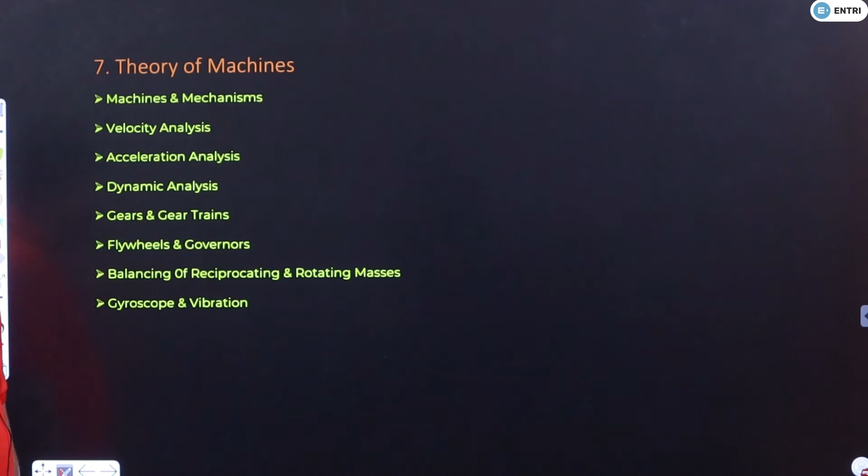So this is the importance of this particular subject. We will learn how to convert one type of motion into another type of motion, like in an IC engine, the reciprocating piston is converted into rotation of the shaft or the wheels. So how to convert one type of motion into another type of motion? Reciprocating motion of the piston is converted into rotation of the shaft, that becomes a mechanism. So what are the different types of mechanisms? This is what you will learn over here.

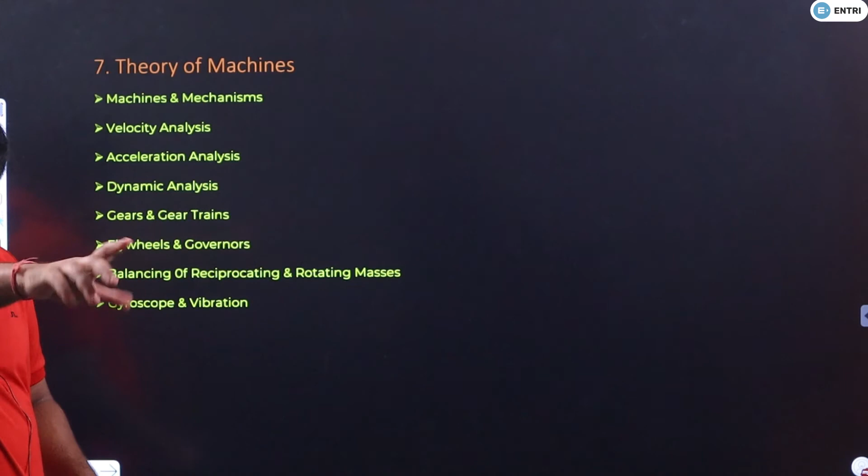Now, the shaft is moving with some velocity. With how much velocity is the piston moving, and with how much velocity will the shaft rotate? This is the velocity analysis chapter. If this is the acceleration of the piston, what is the acceleration of the shaft? If this is the force on the piston, what is the torque on the shaft? That analysis will come over here.

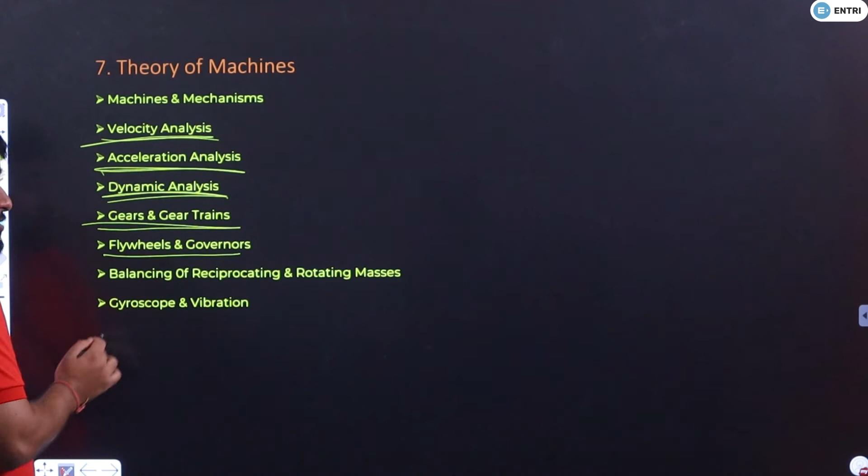Then you will talk about gears, gear trains, flywheels, and vibration, a very important topic. Every year, many times a 4 marks question comes from vibration, a very important topic. So this is a very interesting subject, theory of machines, and these are the chapters of theory of machines.

Anyways, here we have machine design. A good understanding of machine design comes when your strength of materials and theory of machines is good, because shafts and gears which you are going to design over here, shafts you will learn in strength of materials, gears you will learn in theory of machines, and brakes and clutches you will learn in engineering mechanics. So if you have done those 3 subjects in a good way, then this subject will become very easy.

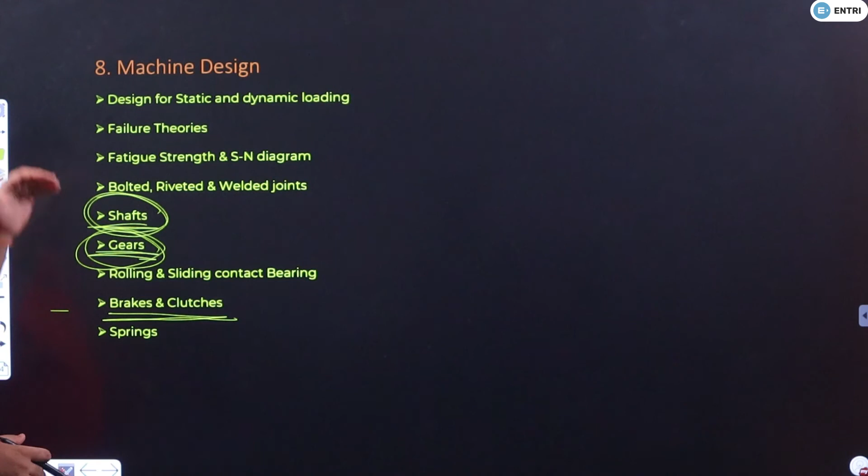So we simply want to design a riveted joint, a welded joint, we want to design a gear, so all those things will come over here. You can press the pause button, take a photo, but these are going to be your topics or your chapters.

Then, so we use so many materials. What are the fundamentals of those materials? In steel, what is the combination of the steel and in what lattice the iron atoms are arranged? If we are going to heat iron, how will the temperature of iron change, and how will the phase change of iron happen?

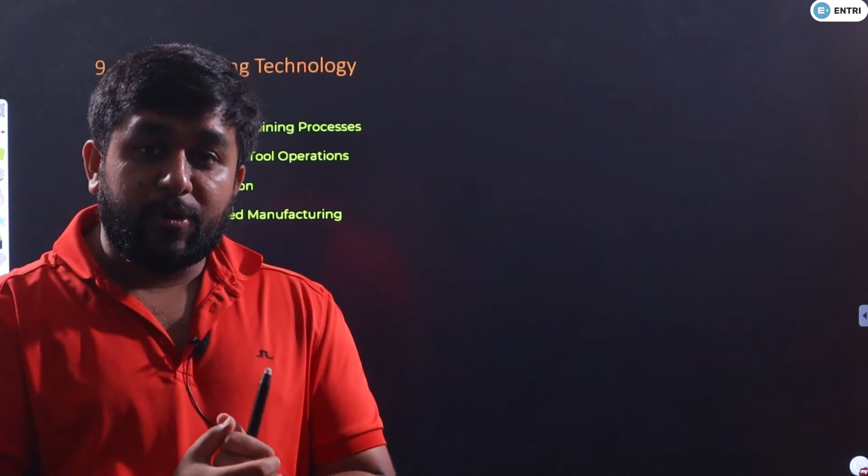If we cool down hot iron, what will happen? If we cool down hot iron suddenly or slowly, what is going to be the difference? So all those things you learn in material science. Once you understand the properties of materials, hardness and red hot hardness, etc. Okay, I am not an expert of this subject, so please don't mind. Once you understand the properties of the material, you learn how to manufacture things from different materials, right?

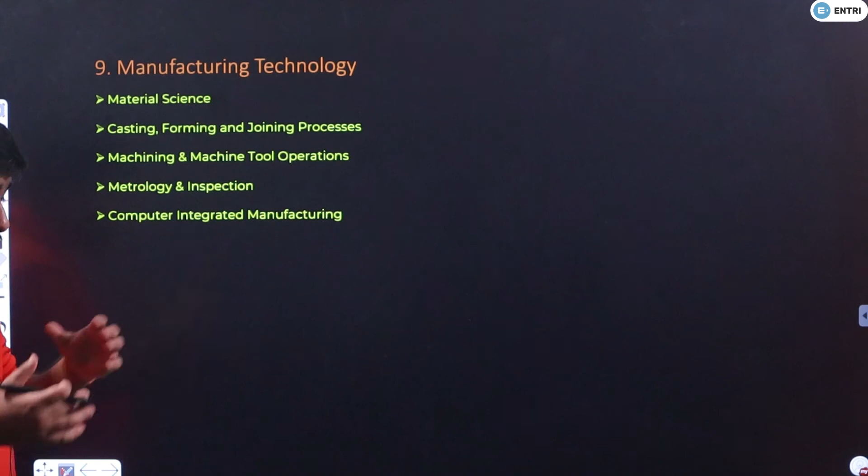So you talk about casting. What is the casting process? What are the important terms in a casting mold? What are the various types of casting? If you want to manufacture this, what type of casting should be implemented? What factors are going to affect casting, that you learn over here. Every year 1 or 2 marks question comes from casting, sometimes a numerical, like numerical on solidification time of casting.

So what is casting? You take an ice tray, pour some water which is liquid, the liquid will cool down and make solid ice. This is casting. So solidification time question comes many times. Then joining processes, so welding is a joining process. What are the various types of welding processes? If someone is doing underwater welding, what process should be used? In automobile industry, we work with steel parts and aluminum parts, so when joining parts together, what type of welding should be used?

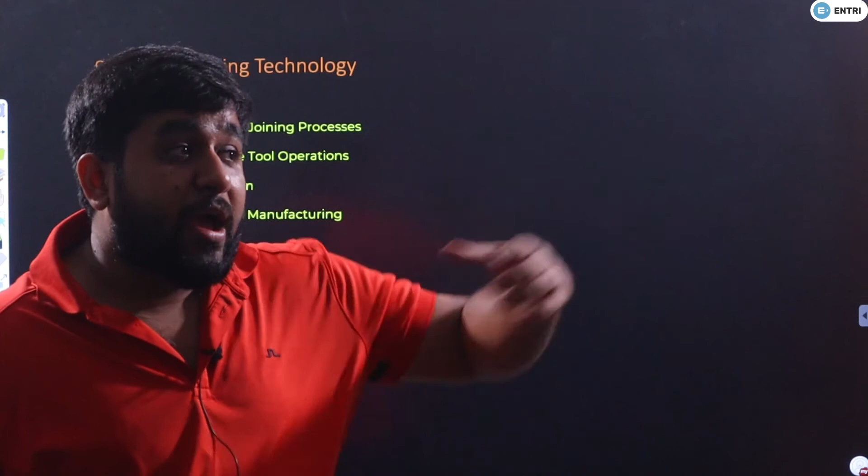What is aluminum thermite welding? Why is it used by people in the railways? All those things you are going to learn over here.

What is soldering? What is brazing? That you are going to learn over here in joining process. What is extrusion? What is rolling? What is forming, what is forging, that you will learn over here.

Now, everyone is aware of lathe machine, and I know that you have seen lathe machine in your college also. So what are the various operations on lathe machine and what is the dynamics of lathe machine, how the cutting of material happens in the lathe machine, that we talk about in the third chapter.

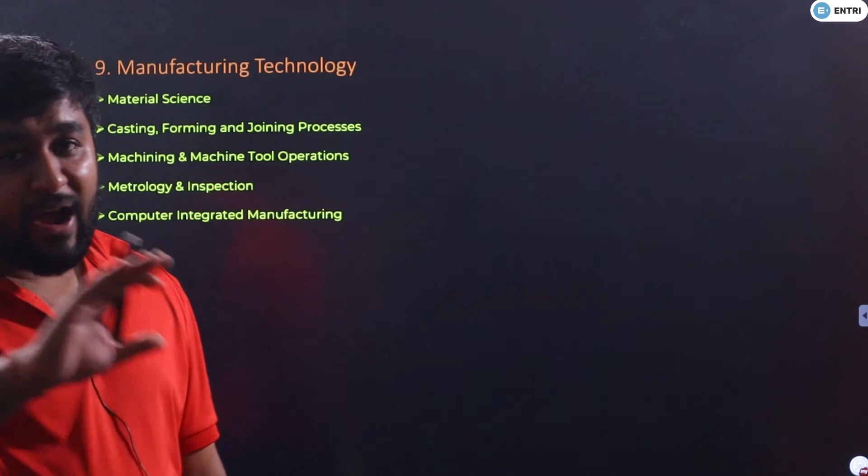So I have a bearing which has a diameter of 10 centimeter, but I made a shaft of 10.1 centimeter. I am not aware that I have made a shaft of 10.1 centimeter and I am trying to push the shaft inside the bearing. So the shaft will not go inside the bearing and the bearing surface will also get damaged. So it is very important to do measurement, metrology, and nowadays we are using computers for aiding our manufacturing process.

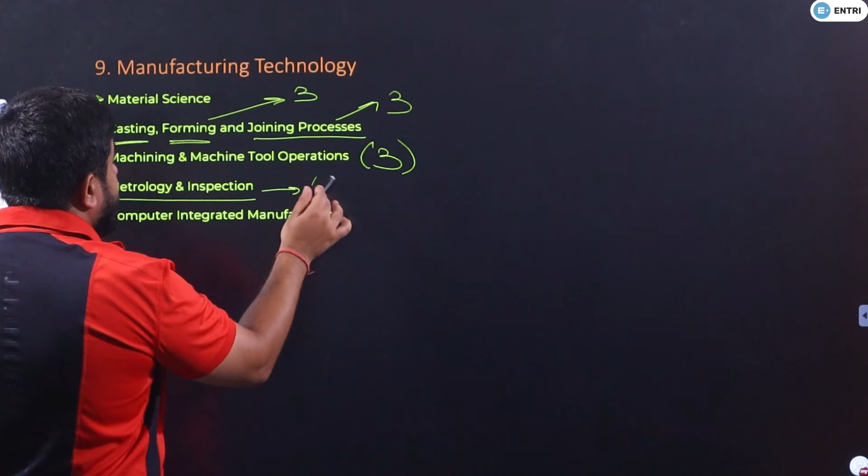So computer integrated manufacturing, definitely 3 marks from here, definitely 3 marks from here, definitely 3 marks from here, and 2 marks here definite, 2 marks here definite. So 3, 3, 3, 2 plus 2, that is already how much? 13 remaining. So very important subject, heavy weighted subject.

Now when I was in the company, every day we were giving 1000 parts to Maruti. When I was working in Magneti Marelli, every day we were giving 1000 air intake manifolds to Maruti. Once our machine broke down, and that breakdown was heavy. It took around 7 days to rectify the problem, to make the machine run again. But we could survive because we had an inventory of 7 days.

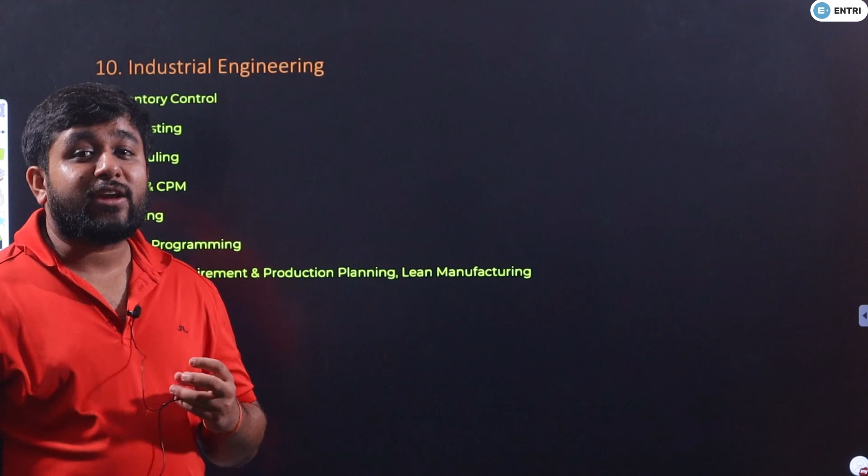So how do you make inventory, and what are the various types of inventory that you do? You learn over here. I was in a service based company. Maruti needs something, we will develop an assembly line, we will manufacture it and supply to them. So I was in a service based company.

But you are going to make a startup, you want to sell something, you have an idea. So making a forecast whether this will sell or not, that you will learn here. Scheduling you will learn over here. Project management you will learn over here. What kind of model should be followed in a bank, you should learn over here, where customers are coming and we are solving their problems at different counters, you will learn over here.

So this is the importance of this subject, industrial engineering. And yes, inventory, very important chapter, forecasting, scheduling, PERT CPM, queuing, linear programming. All chapters very important, because in this particular subject now you can't say from where the question can come.

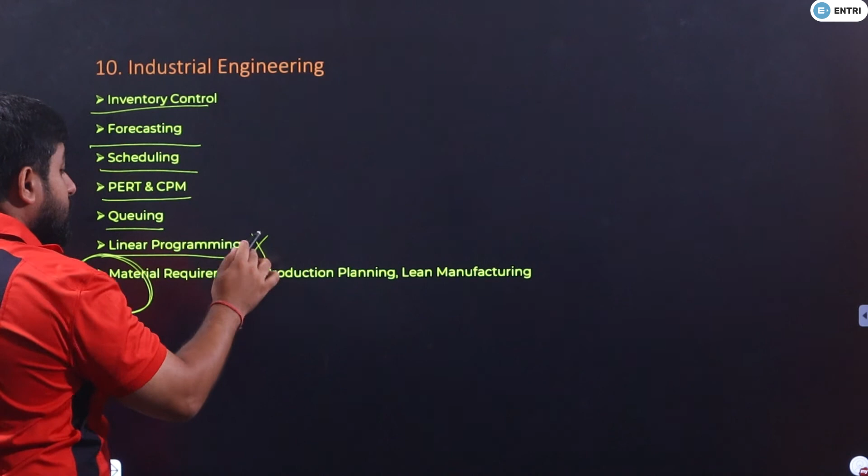Guys, what you are going to learn is actually applicable in real life. So if you do preparation, GATE exam is the one exam which will definitely give you the fruits if you have done hard work. Sometimes it happens that a student prepares for the entire year, but on the GATE exam he or she becomes nervous.

So that student was capable of getting 80 marks, but he or she got only 55 or 60 marks because of silly mistakes. GATE exam is one exam that if you get high marks, definitely you will be paid the best. But even if you are getting medium marks, then also you will get something which will develop your career in the best possible way.

So please prepare for GATE exam with full dedication, discipline, revise on daily basis, solve as many practice questions as possible, because this will not only ensure your bright future, but actually it will ensure that these 4 years of your BTech are not getting wasted and you are actually going to be called an engineer after your BTech, because your concepts will be crystal clear.

Even if right now your concepts are not clear, don't worry, start with doing hard work. After 8 months, 9 months, you can say to yourself, you will be proud of yourself that yes, I have sufficient amount of knowledge and I can call myself an engineer.